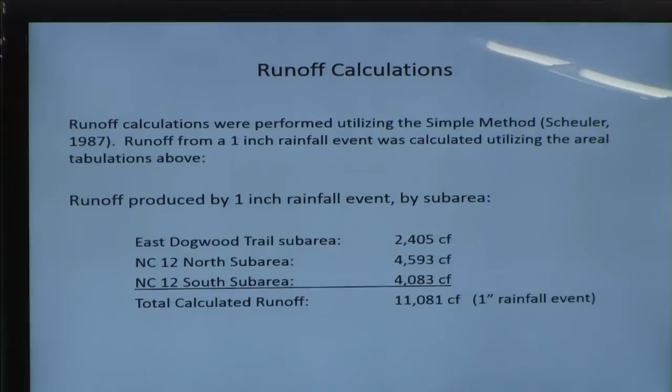Okay, I'm sorry I didn't keep you all up with where I was.

All right. Observed rainfall event, and you can see this is standing at the intersection. The light pole is right there on the left-hand side of the picture, and so you can see where we've got cones sitting out to keep people in the road, and you can see the water's all the way across the yellow lines into the northbound lanes, the turning lane in the northbound lanes. This was a 0.93-inch rainfall event. And that picture was taken within about an hour of the end of the heaviest rains.

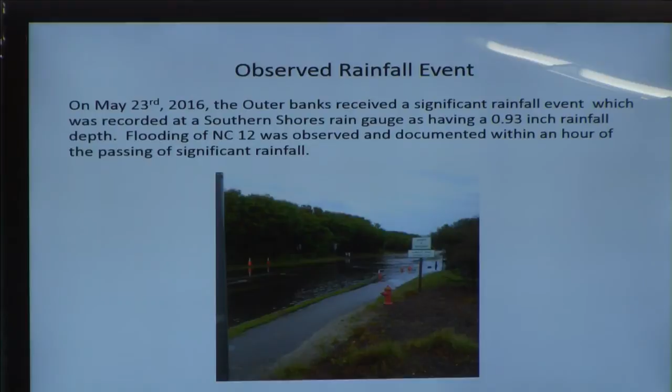I then did a comparison between the calculated runoff that I'd calculated using the drainage area and the simple method, and what I could estimate was the volume of water sitting in the road at that point when I took that picture. And so when I back calculate from my 1-inch runoff down to 0.93, I've got roughly 10,000 cubic feet of runoff that I calculate coming to the intersection.

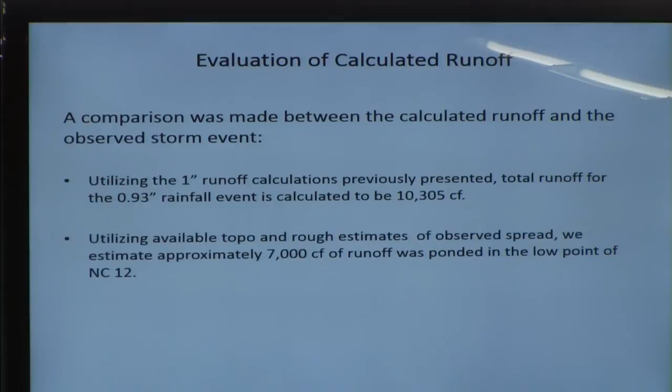Roughly estimating what I observed, I think I had about 7,000 cubic feet of runoff sitting in the intersection. In the world of stormwater runoff calculation, that's actually pretty good agreement. And I'm happy that I'm on the conservative side of what I observed. My runoff calculations didn't take into account those minor swales that do exist. There are other, let me go through these really.

They don't take into account the small amount of water that was caught up in the minor drainage infrastructure. There's terrain undulation that traps runoff that doesn't really show up in the runoff calculations. Classically, the simple method does tend to overestimate runoff for the Outer Banks because of our soils. Our soils are more permeable than the calculations typically account for.

And in this type of calculation, in my observation, the actual volume ponded was a coarse estimate because I wasn't able to actually get survey measurements of the ponded water. Ran out, took the picture, did my best to estimate in CAD and in the survey I had what that spread was and what the depth was.

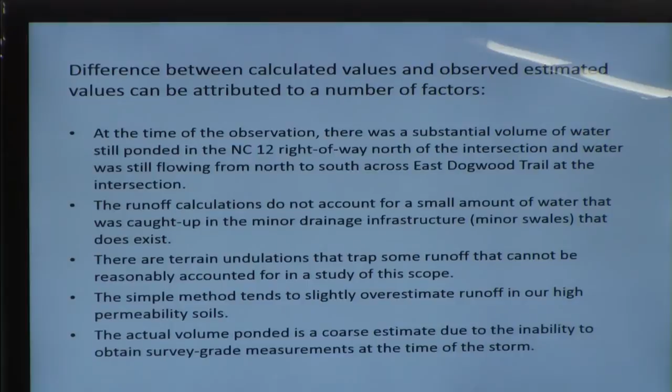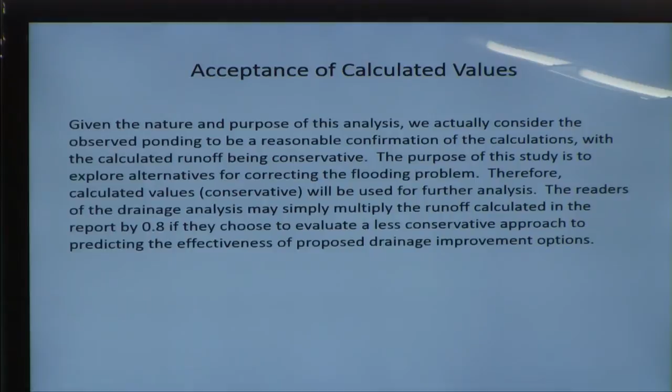So, as I mentioned, moving forward, I actually am going to use the simple method runoff calculations for the rest of my analysis. As I stated here and in the study, if you want a less conservative assessment of calculated runoff versus what we can get through improvements, you can take the runoff calculations that I present and multiply them times 0.8. And that gets you very close to the observed estimate. So, going to get to actual possible improvements.

Before I do, I wanted to present this little spreadsheet of runoff from statistical storm rainfall events, because I did the 1-inch storm and then I extrapolated it into different storm frequencies. And these are from NOAA Atlas 14. These are our statistical 1-year, 2-year, 5-year storms.

One of the nuances when we talk just casually about the 2-year storm or the 10-year storm, there's a time component to that as well. And so you actually don't have one 10-year storm, you have multiple 10-year storms that can occur, depending on how long of a storm event you're talking about. Critical for what we have here, because we really have a flush of water coming down and then sitting, and we have really good soils that if we could get the water over into those soils, we will be able to infiltrate it. The 1-hour storm events are really the important ones for assessing what we might do.

All right, go back to that real quickly. As I talk about these, really the 1-year storm event here at 16,900 cubic feet is an important number to keep in mind, because that's the benchmark that I think that we're going to be able to make with certain improvements.

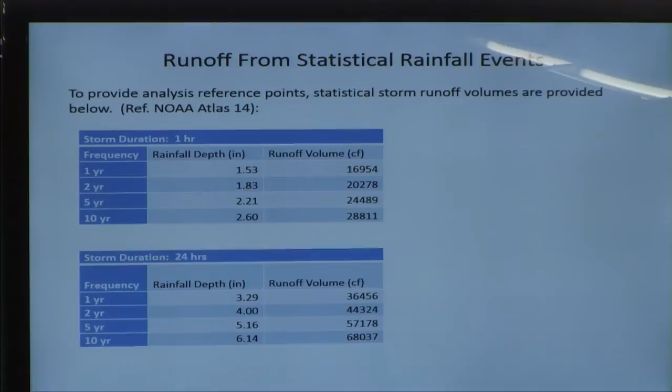All right, just a brief statement about potential drainage improvements. We are not blessed with the opportunity to pipe this water somewhere and get rid of it. As we all know, we can't run a pipe over to the canals, we can't run a pipe over to the ocean, so we're going to have to dispose of it in place. That means that our only options are infiltration systems.

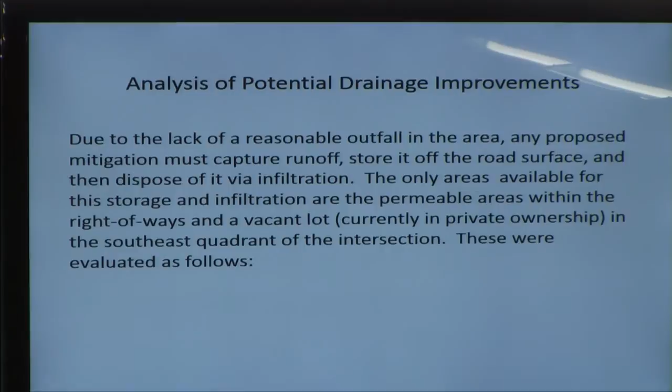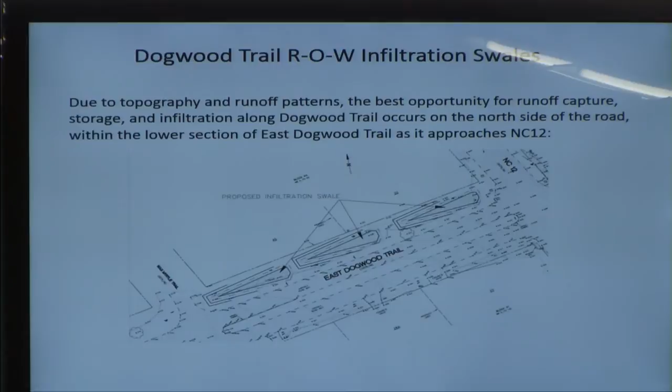What I was able to find was that those three-tiered swales will yield about 800 cubic feet of stormwater storage each. So it's a total of 2,400 cubic feet. And again, back to that one-year storm number, that was close to 17,000 cubic feet. So we can knock off about 2,400 cubic feet of it here with swales along the north side of Dogwood Trail.

Points of interest about this is that the installation is primarily a grading exercise. It's a relatively low cost to put these in. The work is located entirely within the right-of-way, nothing to purchase. There is the potential for utility conflicts, although that potential is relatively small because these aren't deep. This would require that the tree line be cut back to the right-of-way. The tree line does extend over into the right-of-way through at least a portion of that area.

And particularly for the first year, this will require diligent maintenance. We need to establish a really good stand of grass in these basins, or else they'll just fill back in relatively quickly. A cost estimate for that, it's estimated that those improvements would be in the neighborhood of $5,000. So again, low-hanging fruit. We can pick up 2,400 cubic feet of storage for about $5,000.

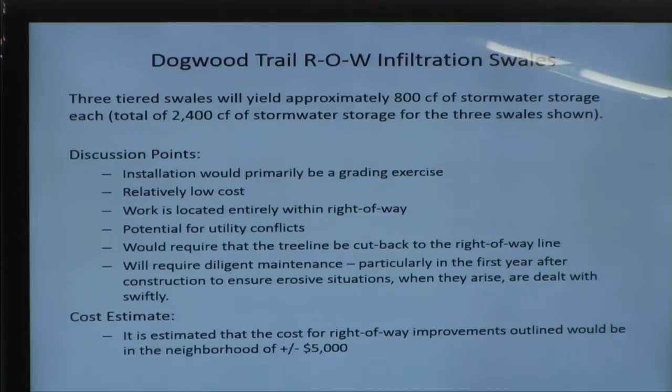All right, the next opportunity we have is for swales in the NC-12 right-of-way. Now, NC-12 to the north of the intersection has a trail on the east side of the road. To the south of the intersection, it has a trail on the west side of the road. So those two locations aren't ideal. To the south of the intersection, on the east side of the road, there is some water that will get there, but the water really seems to be flowing towards the west side of the road. So the best opportunity for the biggest impact is north of the intersection on the west side of the road.

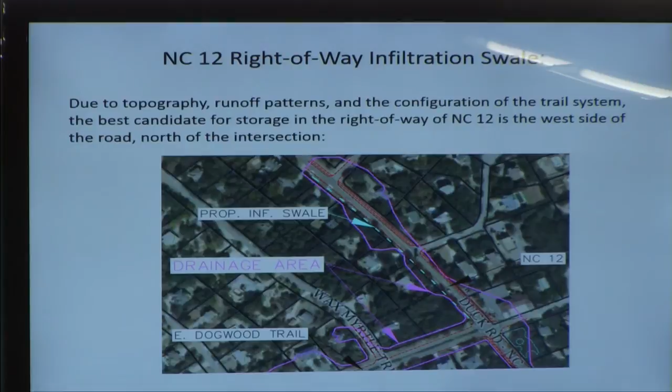I have the turquoise line sketched in here. This, as opposed to a stepped swale basin approach that I took on Dogwood Trail, is much more just a classic swale, a V swale. Allowing for a 6-foot shoulder, a 1-foot deep swale, 3-to-1 side slopes, we can get 750 lineal feet of swale, roughly, taking out for driveways and so forth. And it's going to provide us with about 2,000 cubic feet of storage along there.

Points of interest with this, again, it's primarily a grading exercise. It would be a relatively low cost. Work is located entirely within the right-of-way. There is a potential for utility conflicts, just as with the other one, but again, we're going down a foot. There's not a high potential. It would require that the tree line be cut back to the right-of-way line, and I don't think that's as much of an issue along NC-12. And as with the previous one, quite a bit of initial maintenance to make sure we get a good stand of grass growing, and then periodic maintenance to clean out the sediment that's going to collect in there.

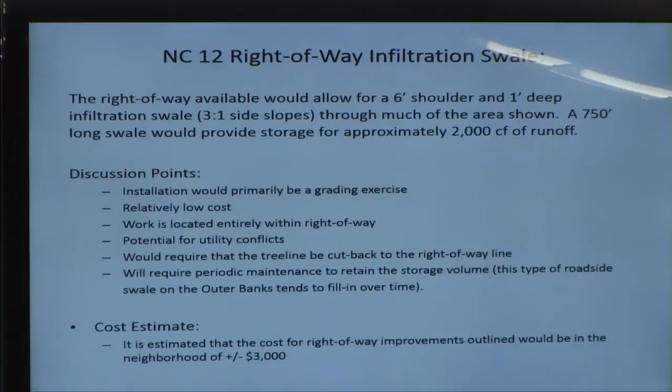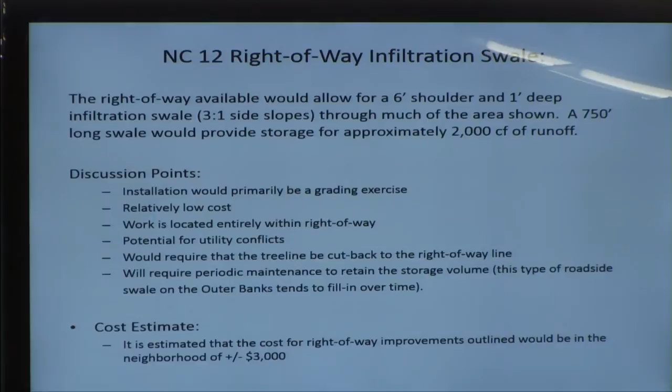I spoke with NCDOT about a cost estimate for installing that, and the neighborhood of $3,000 is the number that we talked about there. So again, 2,000 cubic feet, $3,000. That's a pretty good bang for our buck. And we are now, with 2,000 cubic feet on NC-12, at 4,400 cubic feet. Again, the one-year, one-hour storm event is 17,000 cubic feet. So we've made a dent, but it's not a big dent in that number.

So that brings us to our third infiltration option. And this is the vacant parcel that's located in the southeast quadrant of the intersection, south of the fire station.

And this is not owned by the town, this is in private ownership. But we surveyed it and performed the task of laying out an infiltration basin on it. Shaded in green around the edge. The property's probably about 50% covered in tree canopy right now, moderate sized live oaks. And around the perimeter, I worked my grading to protect those and keep them.

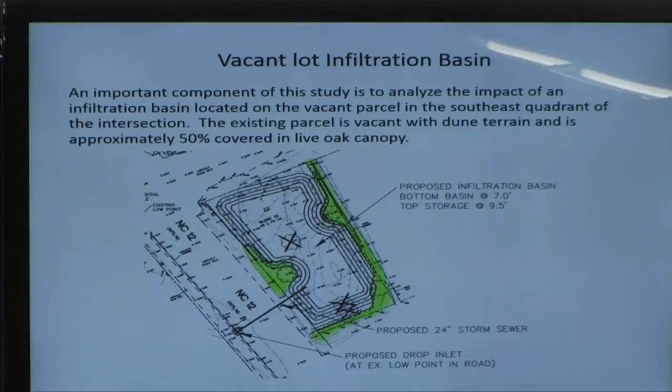There were 3 in the interior that I did the exercise of going around them and then did the exercise of not going around them. And we lose about 1/3 of the volume of the basin when we try to save those 3. So the 3 trees that I'm talking about removing have the X's on them. Everything else around the perimeter are shaded in green. We're going to cut back and protect those.

The grading plan that I showed you yields an infiltration basin with a capacity of 15,000 cubic feet, roughly. Now we're up there, we're hitting our 1-year storm. We're actually getting close to the 2-year storm if we're able to do this option and do the swales in the right-of-way. Points of interest on this one, again, it's primarily a grading exercise. It's a relatively low cost. I'm sorry. Large volume of runoff storage available.

It does require the installation of a drop inlet and a storm sewer under NC 12, and that is a more significant cost. The drop inlet's on the left-hand side of NC 12, and the heavy bold line going underneath NC 12 is the storm sewer going over to the infiltration basin. And the other item is the vacant lot will have to be acquired by the town. It's with DOT's participation.

Cost estimate, the drop inlet and culvert, again, I spoke with DOT about this, and they said to budget in the neighborhood of $50,000. And the big reason why is we're crossing NC 12 and all of the traffic issues and potential utility conflicts we have with that. Our lot improvements, because it's primarily a grading exercise, we're looking more in the neighborhood of $32,000. And the land acquisition, I don't know what that would be, but that would be a significant cost in the big picture. So really, 15,000 cubic feet of runoff storage.

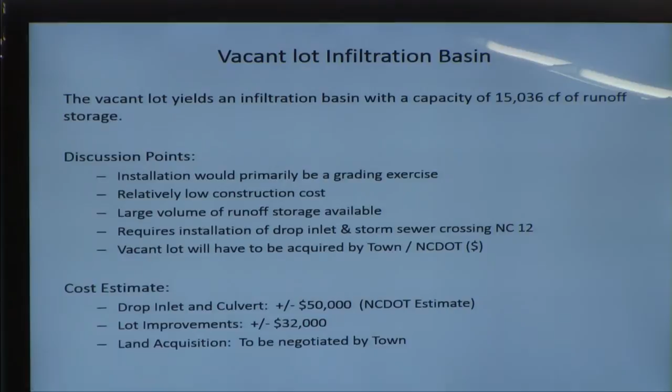Wanted to talk really quickly about nuisance flooding versus the big flooding problem. When I was out there for the 0.93 inch storm, it's not that big, there was definitely water flowing across Dogwood Trail at the intersection. And there's a low point in the southwest corner of that intersection where water just ponds and it spreads out into the road a little bit. And then it trails on along the curb there, down to our larger low point.

Even after a storm event ends and water's not flowing anymore, there's still going to be water sitting in the intersection, particularly at that southwest corner. I label it nuisance flooding because we don't have quite the same life safety issues with that as we do the water further down in NC 12, because people aren't hitting this water at high speeds. It doesn't have the depth. It's certainly inconvenient. It certainly can be a safety issue if somebody comes through the intersection from Dogwood Trail too fast, but doesn't rise to the same level that the NC 12 flooding does.

To address this, there's only one option to truly address it, and that is if we install the infiltration basin and we have that storm sewer going under the road, is to put another drop inlet up here at our low point and a storm sewer down to the drop inlet that we're installing as part of our infiltration basin. In fact, to really address the intersection, I would put a drop inlet on the north side of the intersection as well, and a pipe, so that we have collection points off of our roadway in both corners of the intersection. That is going to be expensive, probably on the order of $50,000.

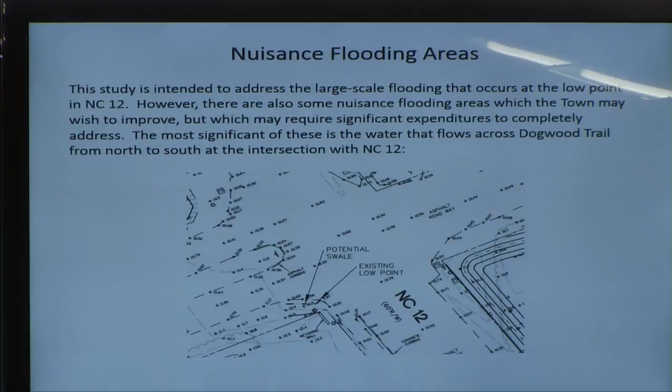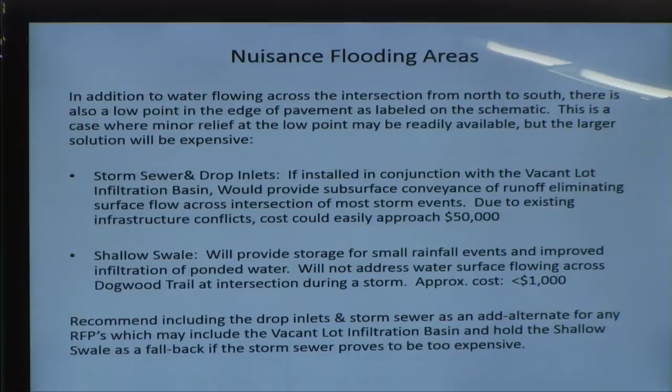So, in terms of addressing this, what I would recommend is if we get to the point that we're doing contracts and trying to make decisions about design, I would include a design that includes all of that storm sewer to fully address the problem. And I would include it as an add-alternate on the bid, understanding that we can address our big flooding problem without that storm sewer, and then it becomes a cost decision.

So just to summarize, this is our 1 hour statistical rainfall table, again, that I had earlier in the presentation. And I just want to point out to you again, 1 year storm, 17,000 cubic feet, 2 year storm, 20,000 cubic feet. And then underneath it, the options, the Dogwood Trail swales, the infiltration, the NC-12 swale, and the vacant lot infiltration basin. You add all of those storage available numbers up, and we are getting pretty darn close to the 2 year storm event, the 2 year 1 hour storm event.

It's our estimated costs for all three items. We're at about $90,000, but that does not include the land acquisition cost. It also doesn't include the storm sewer to go across and pick up the entire intersection on either side of Dogwood Trail. Really quickly before, first of all, let me make sure that is everything. Yeah, that's everything. All right.

One other point that I want to make that I failed to during the presentation is about our actual capacity of the stormwater basin. If we install that, we're going to be flowing water into it throughout a storm event. While we're doing that, water's also leaving the system by infiltration, and we have incredible soils for infiltration systems. So that's one of the reasons the 1 hour duration storm event's really a key event to talk about,

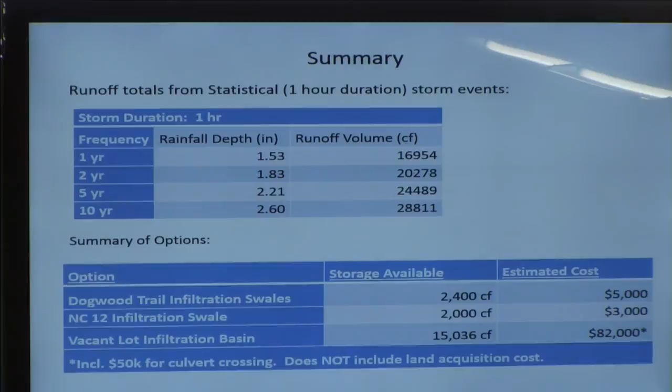With the potential of the pipe going across, how much maintenance would be involved in keeping that open? How's that going to work? Again, the maintenance of the pond and the storm sewer is going to be something that has to be worked out with DOT. Yeah, but physically, it's a storm sewer in a road. It's going to require periodic maintenance.

In this drainage shed with these soils, what does that mean? It's, you know, sand running around. I've certainly seen them that haven't been maintained in a decade or more that still function. I would expect yearly maintenance would be appropriate. And that means popping the top off, digging out the sand that's in it, hauling it away.

Now, would there be sand going into the pipe itself, going across the road? Typically, and again we're getting into construction details, but typically on a system like this, I would make the drop inlet deeper than the pipe, have a sump in there, and actually have holes in the drop inlet so the water can leave that system, but so that heavy sediment stays in that drop inlet rather than going into the pipe.

Can you go back to that southwest corner? Is that East Dogwood and 12? Yes, East Dogwood is running roughly horizontal, 12 is running north-south. And the trails on that side, did you look at a raised trail and putting a swale underneath it for that?